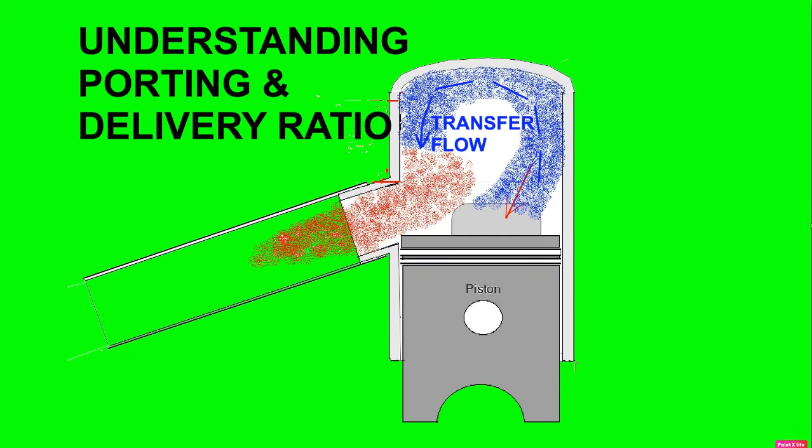Yeah, baby, power. That's what we like.

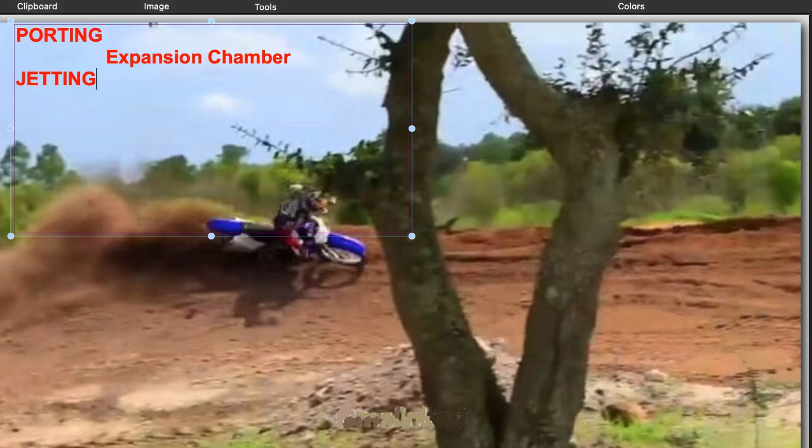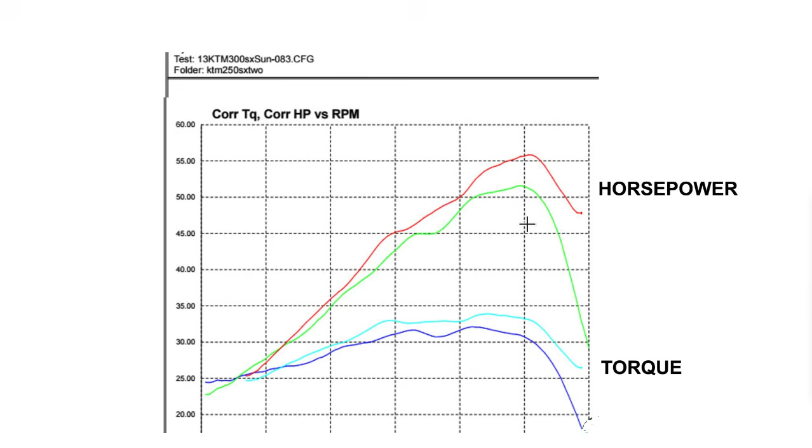But where does power come from? It comes from porting, expansion chamber, carburetor jetting, the head squish band to speed up the burn rate, ignition timing so that the burn time matches the need of the engine. That varies with fuel, it varies with engine oil, it varies with the compression ratio of the engine, and with the squish band, the squish velocity. All those add up together to create the torque that is measured in a dyno. From that torque, we're able to calculate the horsepower. Horsepower is basically torque multiplied by the RPM divided by 5252.

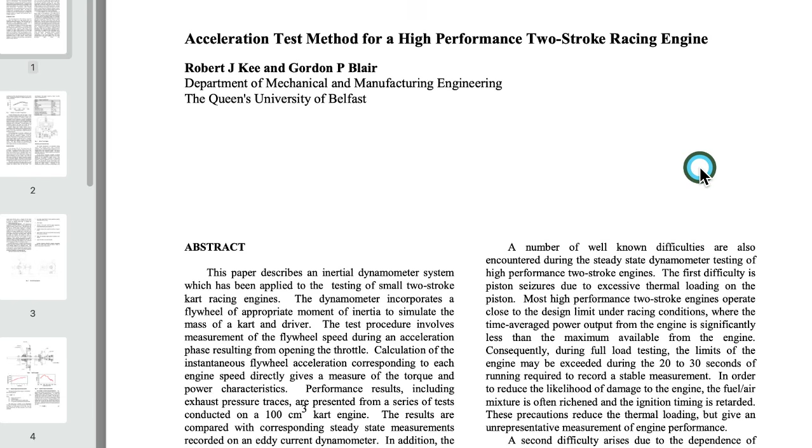Here we have the research paper by Gordon Blair, and from that, here's the specs on the karting engine he used.

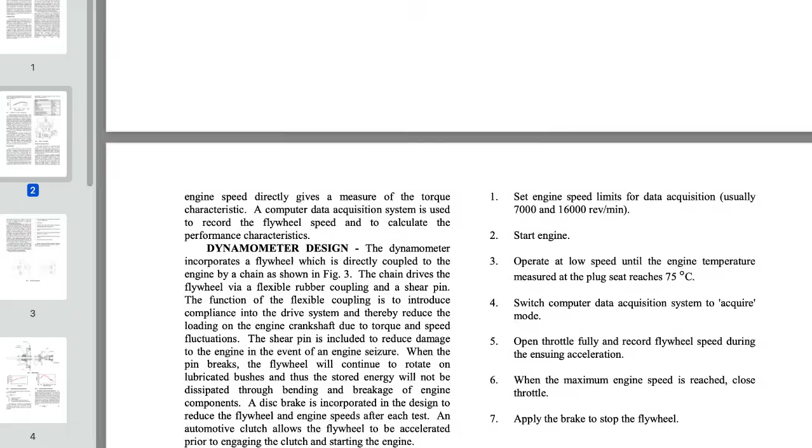The exhaust pipe. I want you to read right here. It says 4.49 and 4.72 seconds for the perforated and solid systems respectively. On karting engines that have one gear, one speed, they often put holes in the baffle cone and then enclosed it again, and that greatly diminished the return wave from the baffle.

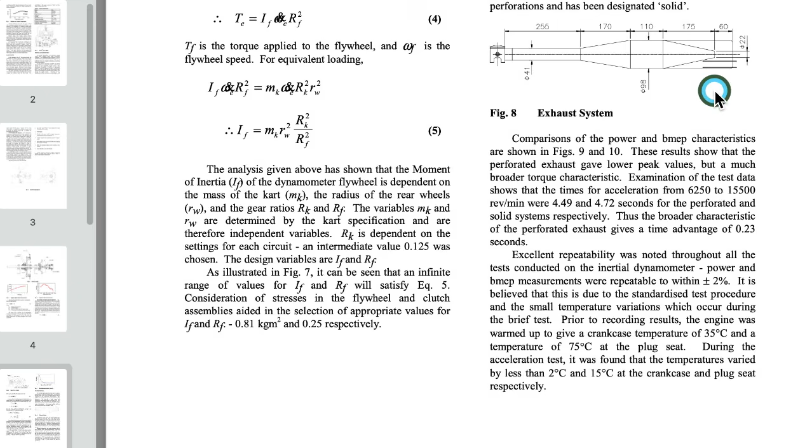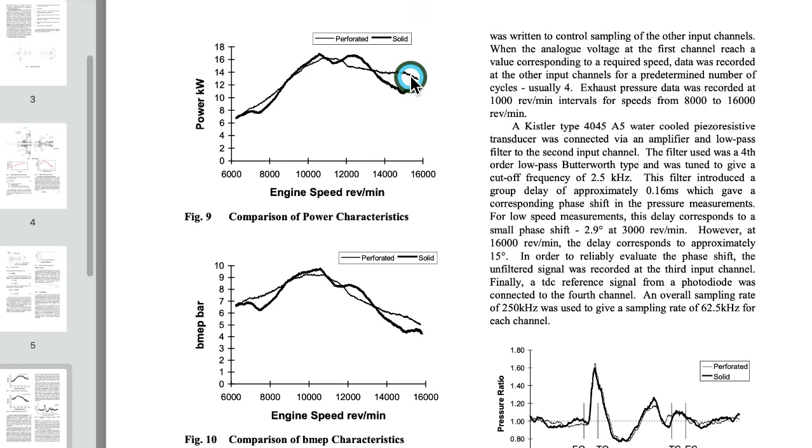Here we see the horsepower curve. The fine line is with the perforated baffle, and the thicker line is with the regular baffle cone. You see it lowered the very height of the peak a little bit. It got rid of the pre-power band power dip due to the baffle return wave, but it gave a better power extension for overrev, which is what the karts really like.

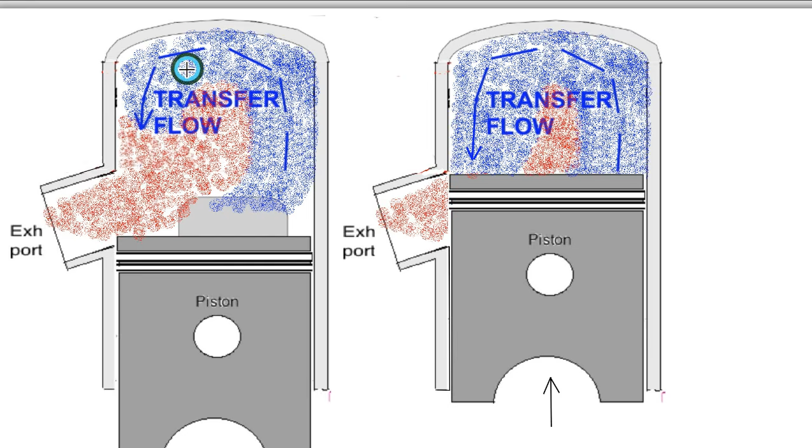So the idea is that we're going to fill that up as much as possible, have as little as possible of spent gases remaining. This is showing as the piston's rising how there's so much spent gases there, and the transfer flow is pushing those spent gases out the exhaust.

What happens though is as the RPM increases, the time that exists from when that transfer port is first opened to when the piston comes up to close the exhaust port becomes less and less. You can see here from 7.9 milliseconds to 5.5 milliseconds. But the transfer flow is still about the same speed each time because it's governed mostly by the opening of the transfer port and the pressure that's behind it, which is the crankcase pressure, which depends upon the crankcase compression ratio.

So at lower RPM, you have more time for that transfer flow to go past that top edge of the exhaust port and lose some of it out the exhaust port. And at high RPM, there's less time available for that transfer flow to reach that point. The end result being is this pyramidal shape. It goes up to its highest point, which is where the flow is right at the top of the exhaust port when the piston closes it, and then down.

So we've got loss of intake charge out the exhaust port, and then we've got a lack of pushing out the spent gases from the previous cycle, which is this right here. Even at best, you can see not all of it is transfer flow, which is why in the case of Blair's engine we have 92% maximum.

So yeah, the transfer flow, the delivery ratio affects the torque and the horsepower. So the challenge of my program was to get that triangle shape to peak at the same RPM on the different engines that I tested.

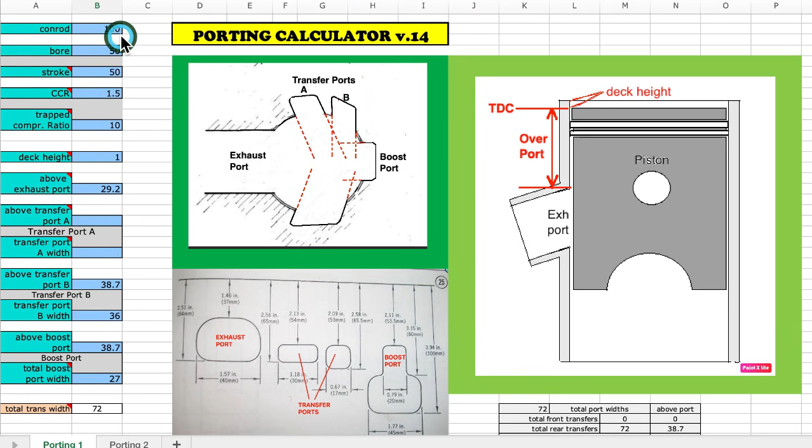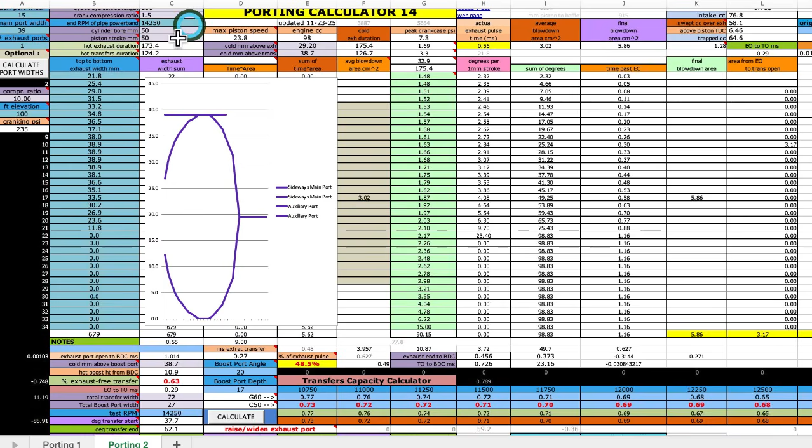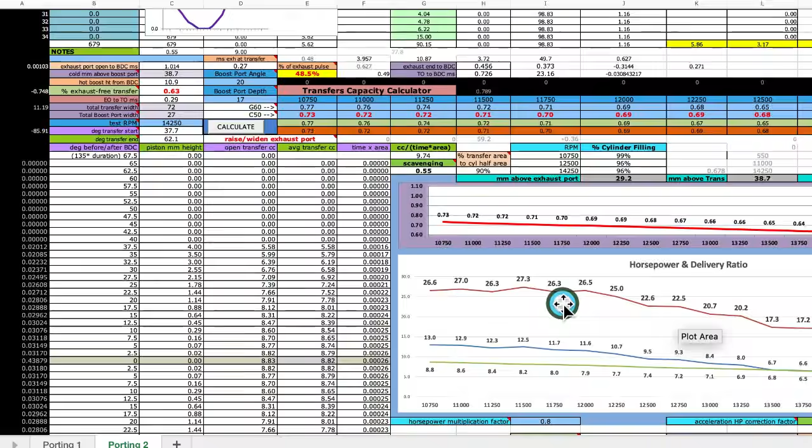So this is my porting calculator. Sheet 1 is where you enter in the basic information. Sheet 2 is where you set the top RPM, the widths of the exhaust port every 1 millimeter down. If you want to also show the horsepower graph, you can also enter in the boost numbers from my pipe calculator. And then when you click calculate, it gives you this graph right here.

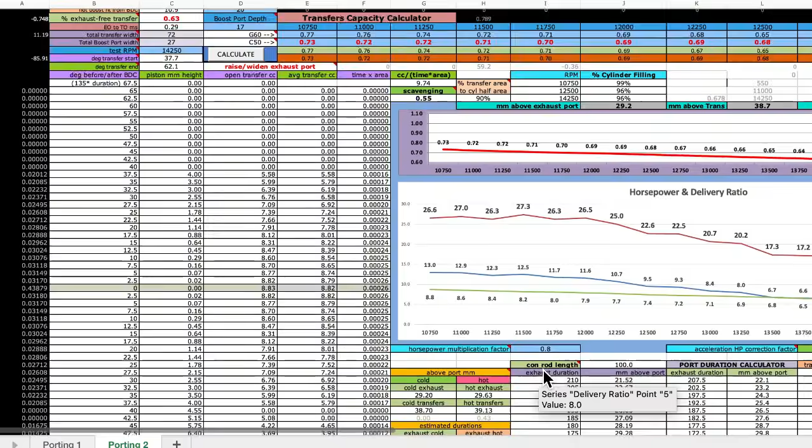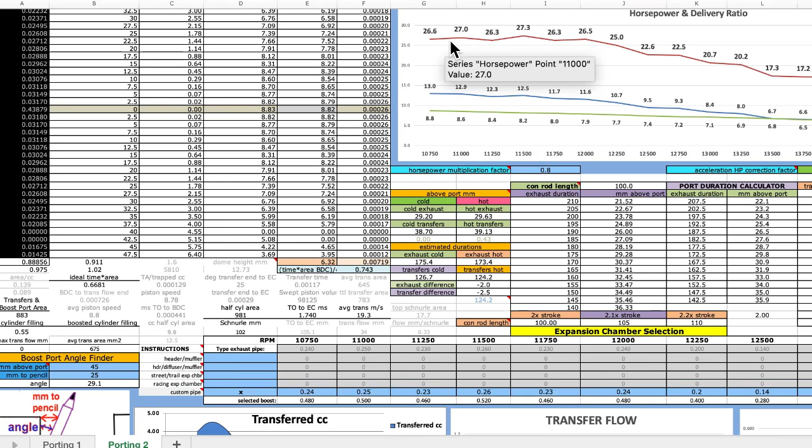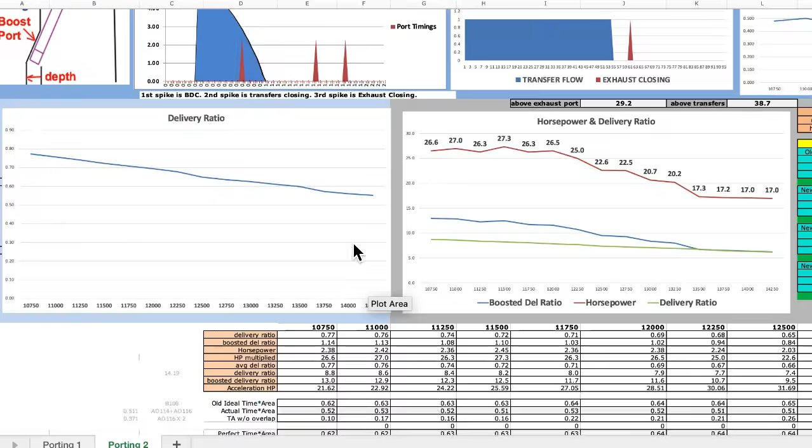And it's three things: the delivery ratio without the pipe boost, the delivery ratio with the pipe boost, and the horsepower, which is the result of that boosted delivery ratio. If you scroll down here, it shows you the delivery ratio, and it is actually peaking right at 10,750 RPM, which I will show you by lowering the peak RPM. So you can see the peak is right there, which is 10,750 RPM.

Which on Blair's chart is 10,750 RPM. So that's the goal of any program, to get it to match measured reality.

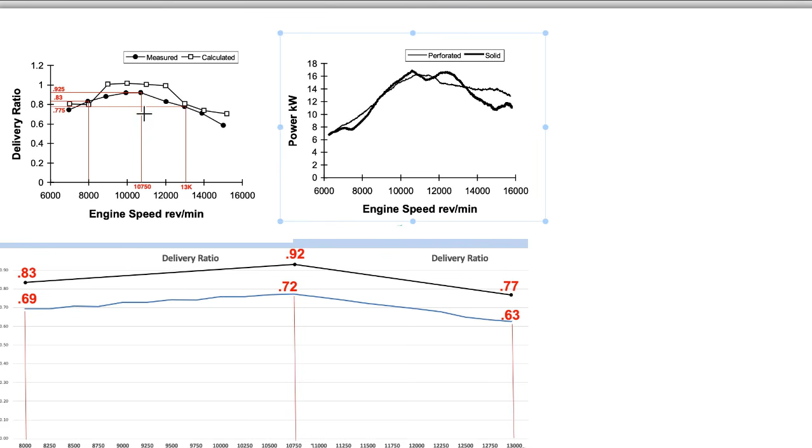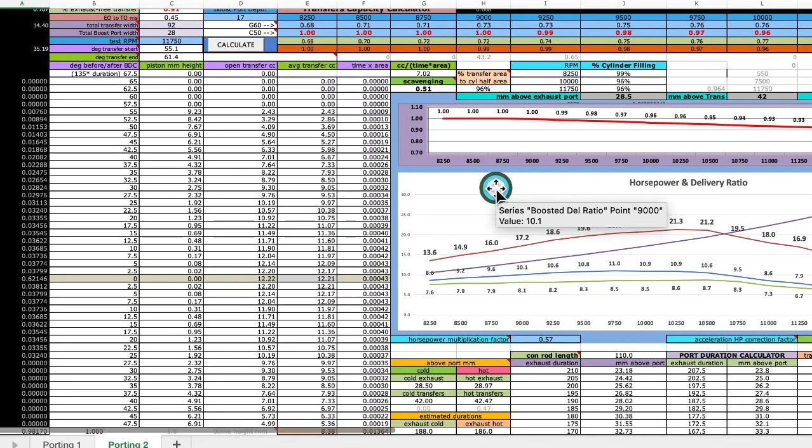But this is a karting engine. It's got a really long power band, so I'm going to minimize this right now and show you a more normal example. This is an engine from the Aprilia RS 125.

What you can see here is that it's peaking right at 10,500 RPM, which in combination with the pipe boost gives almost the same peak. It actually peaks at 10,250. But what I want to point out is that you want that peak to happen pretty close to the peak where you want the top horsepower to be.

Because like I said, the delivery ratio affects the torque, which affects the horsepower.

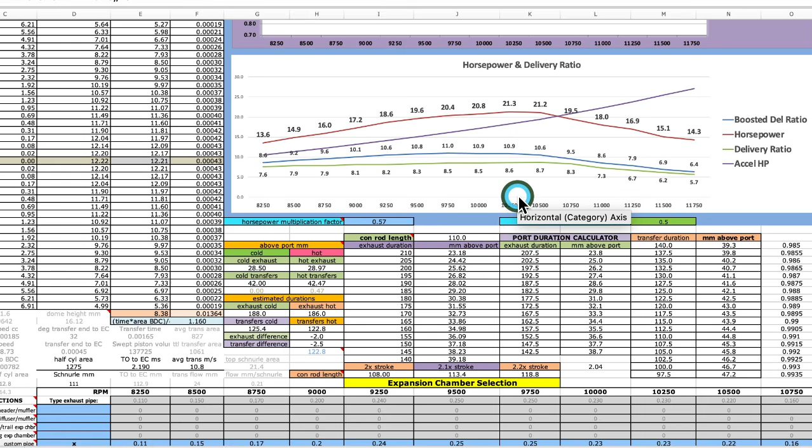Let me show you now a chart from the KTM SX250. On this one you can see the peak of the delivery ratio is at 9,750. This is a modified KTM, and it revs really high. It revs too high — the pistons don't last very long in it.

So we got a peak horsepower at 10,000 RPM. But again, the peak delivery ratio is within this zone, close to the middle of where they wanted the peak horsepower to be. Let me show you the other graphs down here.

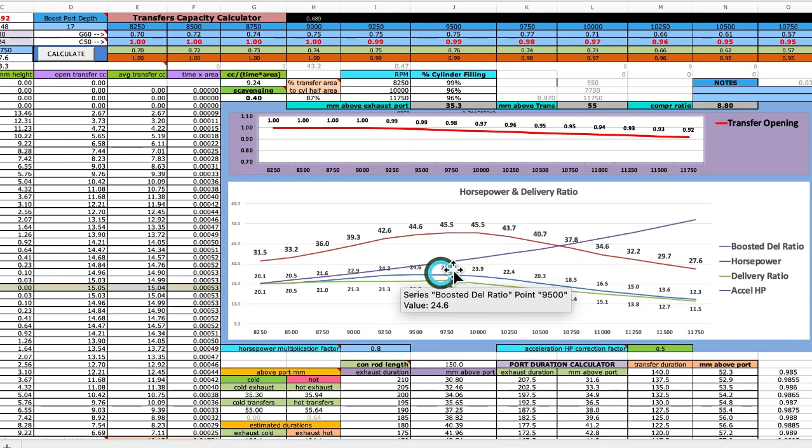This is showing the flow of the transfer into the cylinder, and it shows you where it ends. This is bottom dead center, this is transfer closing, this is exhaust closing. This is showing the transfer and how far it reaches towards exhaust closing, the top of the exhaust port.

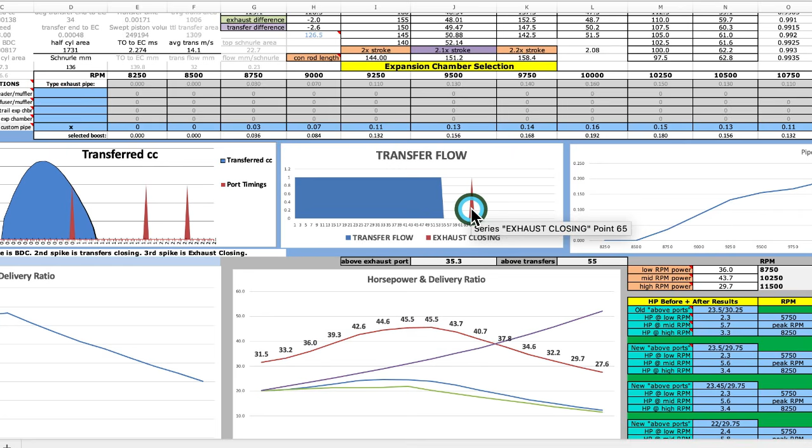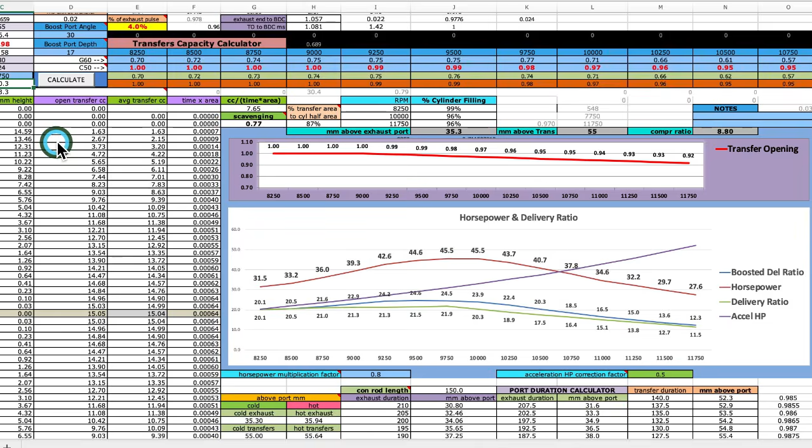And that is at 9,750, so I'm going to enter that RPM here to show you that that coincides. So we've got this in agreement with reality. I want to show you how this is in agreement with reality.

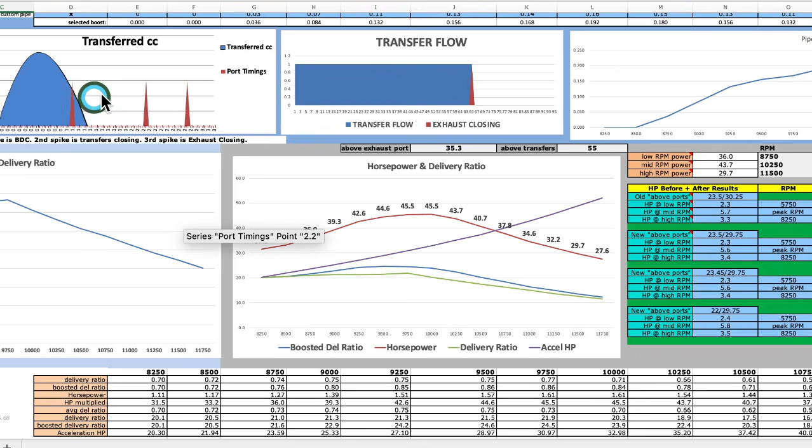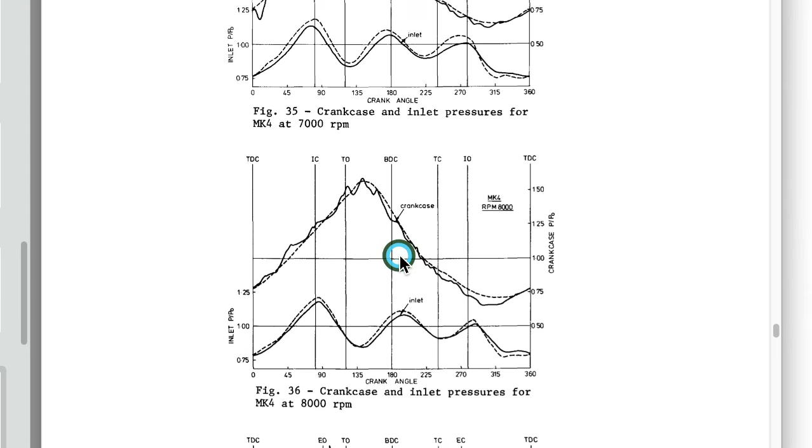This is Blair's research paper called The Unsteady Gas Exchange Characteristics of a Two-Cycle Engine. Here you can see at 8,000 RPM, the MK4 pipe that he tested on the Husky 250 ends its transfer, which you can see by the end of the crankcase pressure, at about two-thirds the distance between bottom dead center and transfer closing.

This is that same engine entered into the porting calculator, and over here it allows you to record the RPM of the peak delivery ratio, the highest point, and the combustion-free transfer, which is this graph right here, at whatever RPM you want to make note of. Like in this case, the test RPM is 8,250 for this old Husky 250.

These numbers right here are the percent of the transfer opening from the time the piston uncovers the transfer to bottom dead center — the percent of that time that is without the combustion pressure holding it back, because it has to go down all the way to somewhere between 5 and 7 psi for that transfer to be allowed to flow into the cylinder.

So I really don't like to see any less than 0.8, which is 80%. This one goes all the way down to 70%, which I don't like. I think it's a bad design. And this right here is the compression ratio calculator.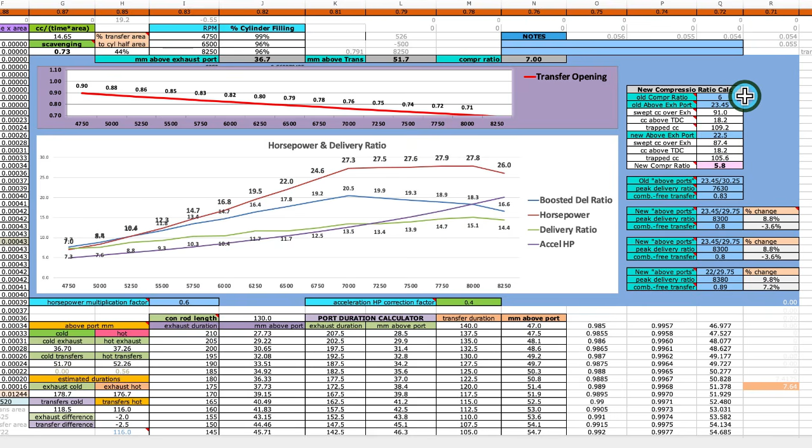So if you know the compression ratio of the present setup — let's say it's a stock bike and you know the specs on it, or you've done the measurements — using this calculator right here, it tells you what the compression ratio is.

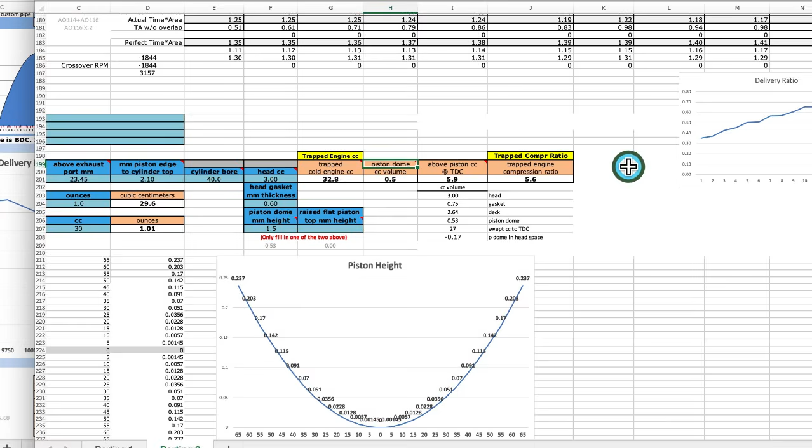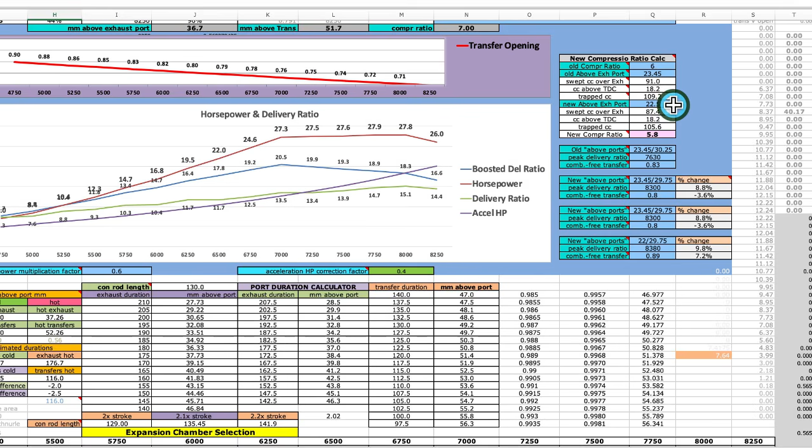Trapped means what's above the exhaust port. So you've got the compression ratio, the distance above the exhaust port to the TDC point, and then when you change that distance above the exhaust port, it tells you what the new compression ratio is. So that's new in this calculator.

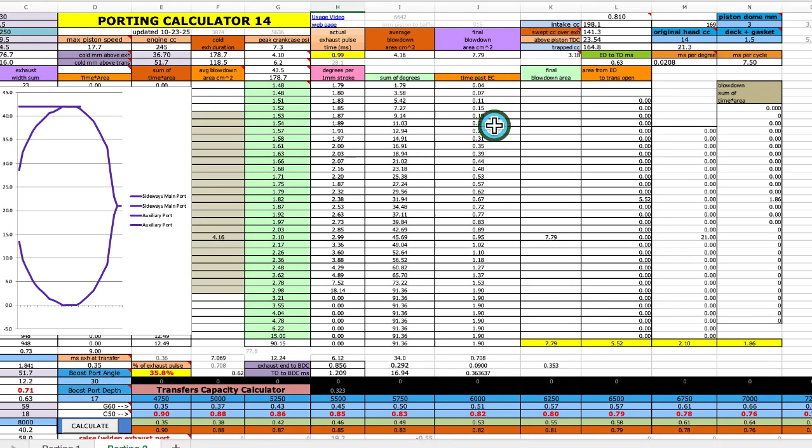This right here shows you the distance above the exhaust port and the distance above the transfer port. And other than that, and the first page being separate where you enter in most of the data, it's pretty much the same as it was before.

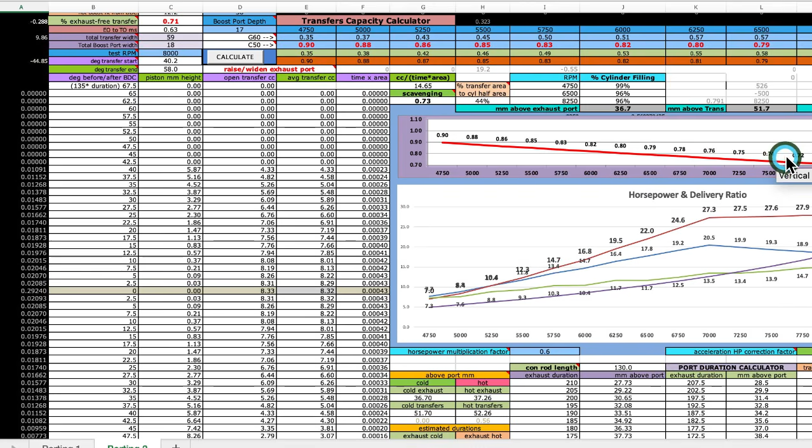The biggest change now is that it does a really accurate simulation of the delivery ratio, which is the most important thing. The previous porting calculators were going off of the time area, also figuring in the loss of transfer opening due to that overlap of the combustion pressure. It's a much better design now.

I have to mention about this section right here. This section is about the pipe boost. You can select no expansion chamber, just a header and a muffler, or a header diffuser muffler without a baffle cone, which some mopeds have, an expansion chamber with a diffuser and a baffle cone, but of a moderate design for street or trail.

Or a racing expansion chamber. Or if you have my pipe calculator and you've done the work on it on sheet 3, row 300, you can copy those numbers and enter them in right here. And that tells the program how much to boost the delivery ratio to give this boosted delivery ratio, which is what the program uses to get the horsepower.

It's not real critical if you don't have my pipe calculator — just choose one of these. Only enter one cell with an X. Don't leave two of them. You'll see how the horsepower changed.

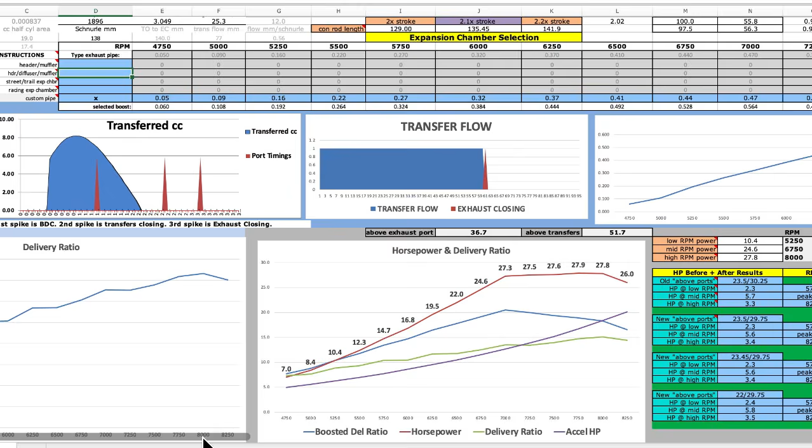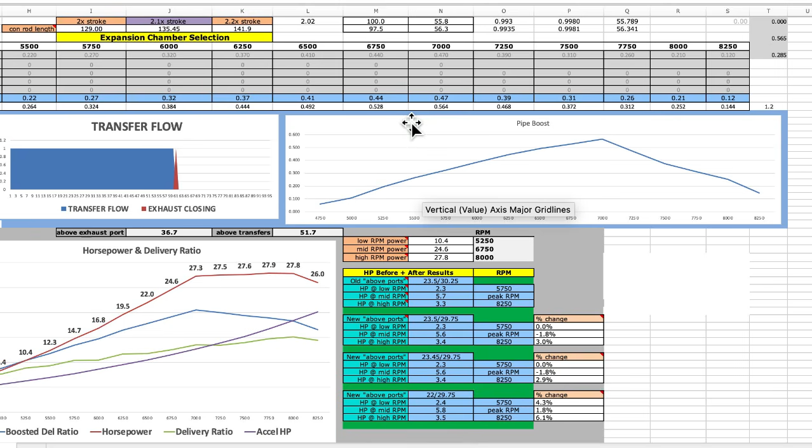And after you enter them, you can look over here to make sure it's a nice smooth transition. If one of them is like way up here, maybe you entered 0.14 instead of 0.04 — some error. So this gives you a visual of what you just entered.

So that's pretty much it. If you have any questions, please let me know.